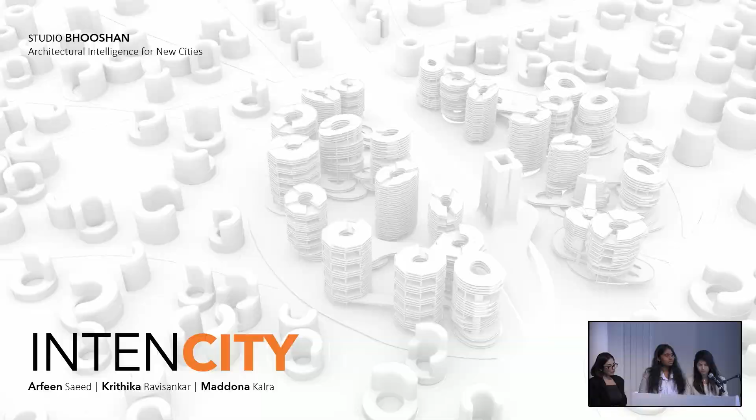Our thesis explores how urban intensification can enable a sustainable increase in urban populations, contributing to healthier and more vibrant communities.

A significant population increase is anticipated, with projections indicating that 68% of the world's population will reside in urban areas by 2050.

Bill and Melinda Gates emphasized in their foundation's annual letter in 2019 that we need to build one New York every month for the next 40 years to accommodate the growing urban population.

But focusing on New York, Manhattan boasts one of the highest population densities in the world, with over 70,000 residents per square mile. In contrast, Staten Island, located just 40 kilometers away and well connected, has a significantly lower population density of only 8,000 people per square mile.

Herein lies our unexplored Pandora of potential. Suburbs have attractive qualities like low cost of land, while they enhance connectivity to urban centers, making it easier for residents to access jobs and amenities, like light rail lines. Our thesis aims to capitalize on the various benefits suburbs have to offer.

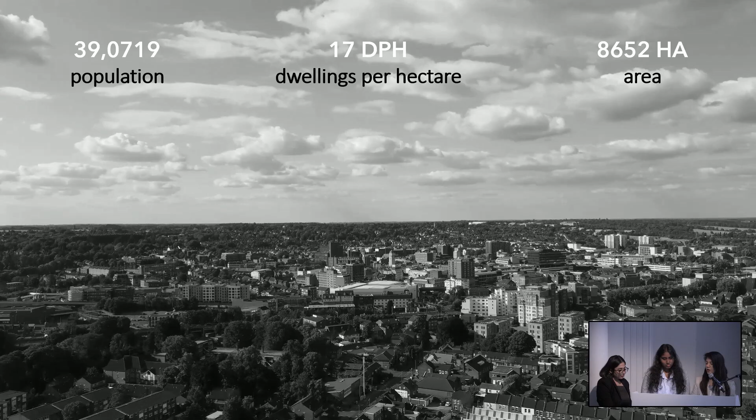Taking a look at Croydon, a suburb in London with over 8,000 hectares and merely 17 dwellings per hectare, shows unequitable distribution of resources, which with a little planning can be our best asset.

We intend to propose models focusing on intensification, which will have co-location of work, visit and live for mixed use, which allows us to use alternate modes of transport.

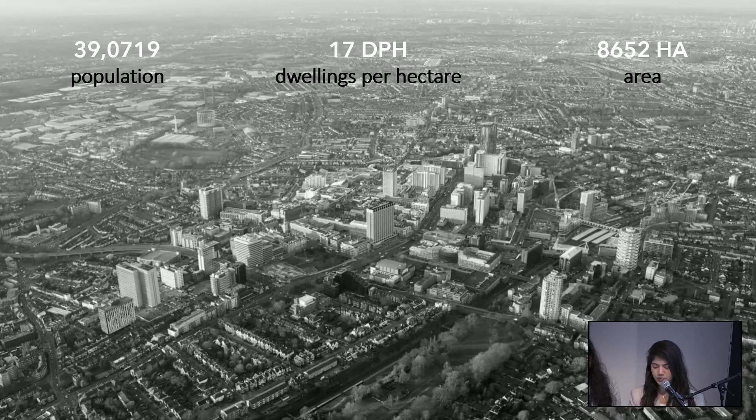Our Croydon model refers to areas which inefficiently utilized land and other built infrastructure. There are over 18 Croydons in London alone. This begs the question, how many such might there be in the entire world?

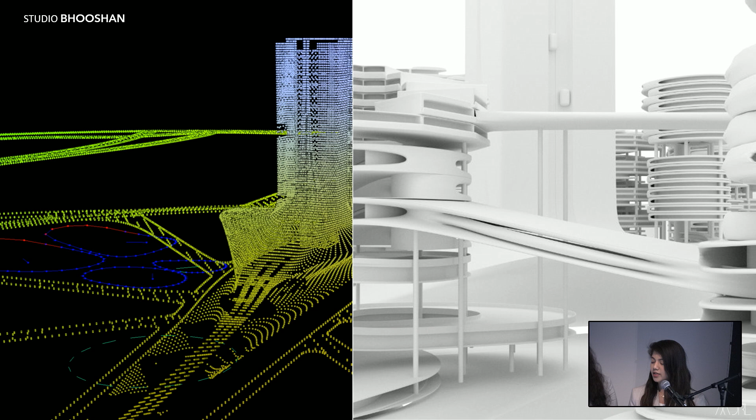We approached our thesis through two primary lenses, urbanism and architecture, emphasizing a bottom-up emergent strategy that prioritizes community engagement and organic development.

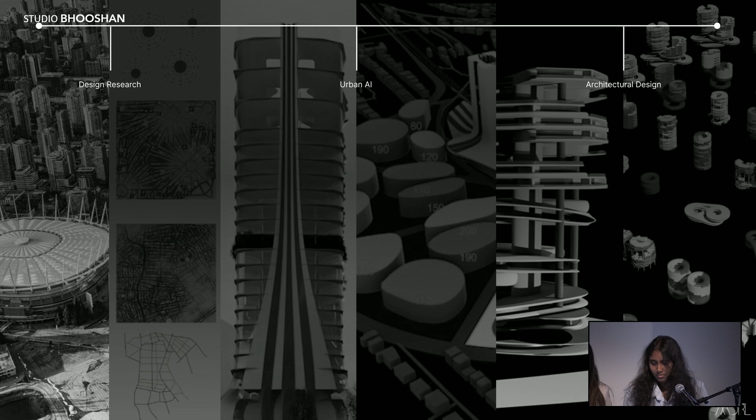The research methodology consisted of three notable phases: design research, urban AI, and architectural design. In our first phase, we studied at the scales of city, district, neighborhood, and the street level so as to be able to identify and benchmark our objectives for the thesis.

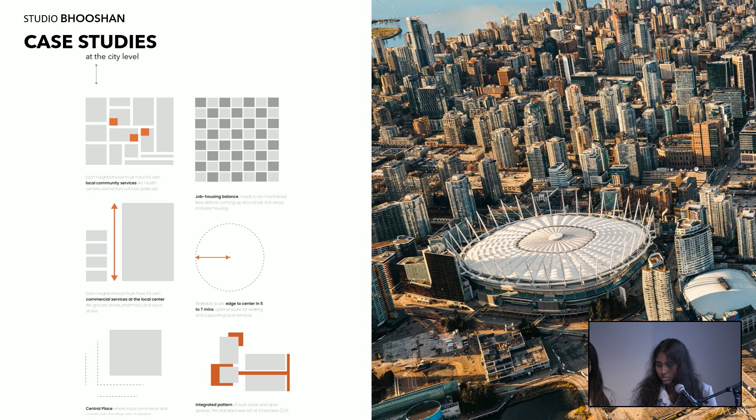Vancouver successfully implemented high-density development while maintaining quality of life. We learned of co-location of work, live, and recreational functions within the boundaries of a neighborhood, creating vibrant environments.

At the district level, our studies of neighborhoods and districts to maximize social interactions among residents yielded valuable insights from case studies of Poblenou in Barcelona and high-density neighborhoods like Choi Hung Estate in Hong Kong, like using public spaces as social catalysts.

Both case studies highlight design that prioritizes walkability and public settings that serve as a forum for association and social interaction beyond home and work.

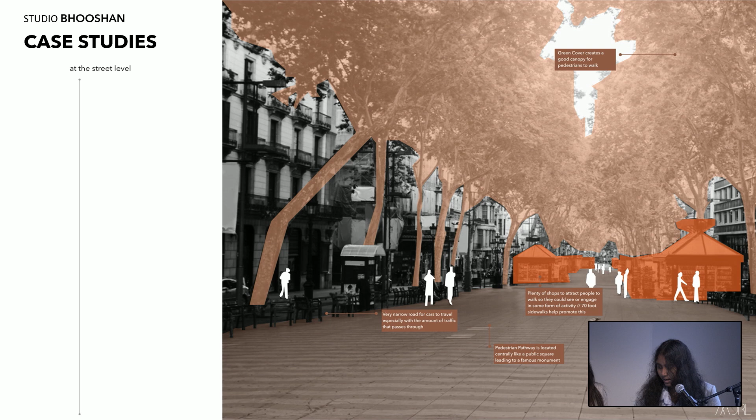At the street level, we studied streets like Las Ramblas, which revealed the crucial importance of human scale experiences, offering a first-person perspective that shaped our understanding of how urban spaces are perceived, which we later tried to use as a method of evaluation in our later studies.

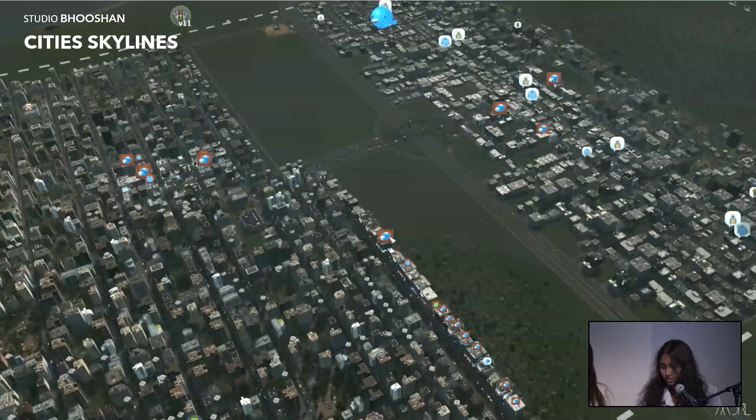Cities Skylines utilizes agent-based modeling to create a realistic urban simulation. Each citizen in the game is an individual agent with unique behavior and decision-making processes. This allows for a more accurate representation of how people interact with their environment and make choices within the city.

We studied the game for its urban dynamics, like happiness index, traffic index, and land value, as one of our key takeaways was its demand-based land allocation system.

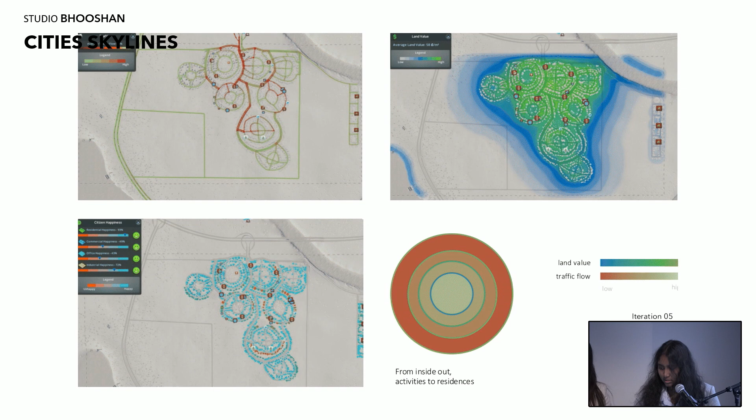As residential zones populate, demand for commercial area increases. When commercial zones fill up, industrial demand rises to provide jobs and goods. This system maintains a triangular balance between residential, commercial, and industrial zones. Each zone type influences the demand for others, which we try to replicate in our own urban system.

Here we are looking into contextual details of Croydon, about how many train stations we have there and how many trains per day are connected from Croydon to central London. As you can see, it's just 30 to 40 minutes away by train.

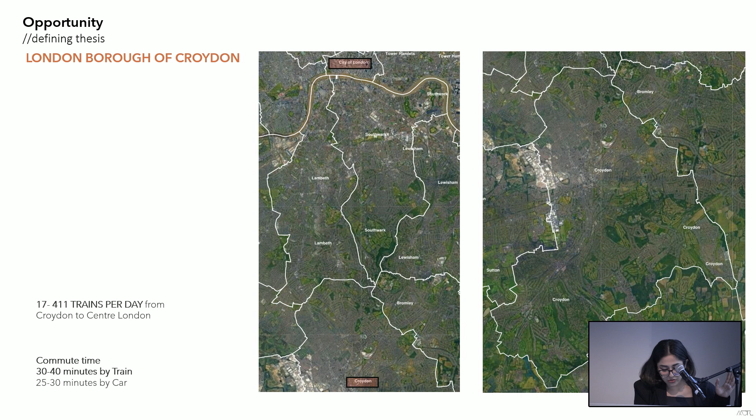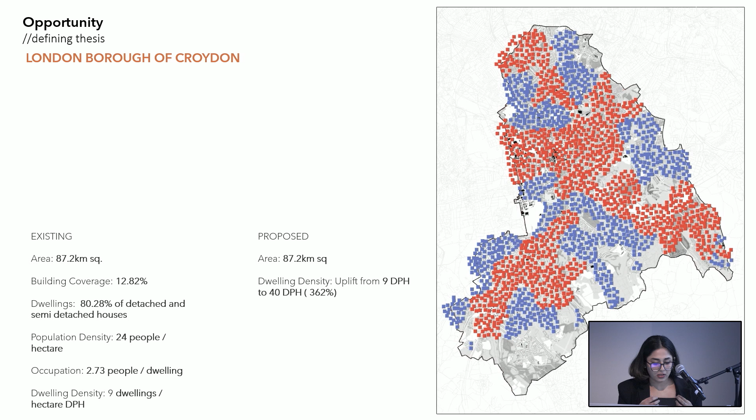So this is how we started looking forward into intensifying Croydon, which is one by one transit hub, and then later growing it throughout Croydon, which is 87.2 square kilometers.

Here you can see how time-based growth can affect the intensification of Croydon. It starts from the very basic 800-meter radius near the transit hub, which is 10 to 12 minutes of walking distance, hence increasing more walkability throughout the London borough of Croydon.

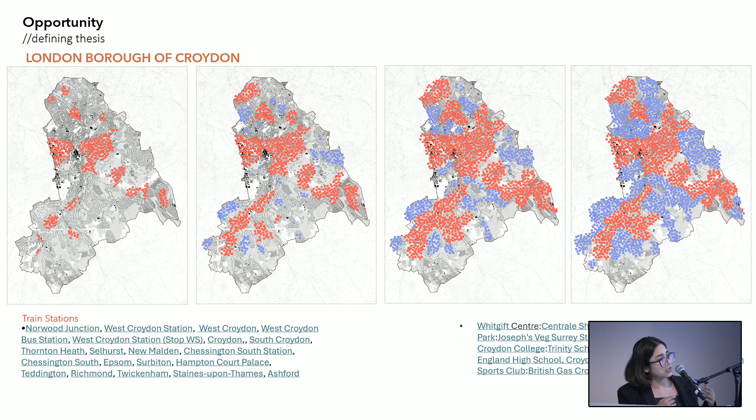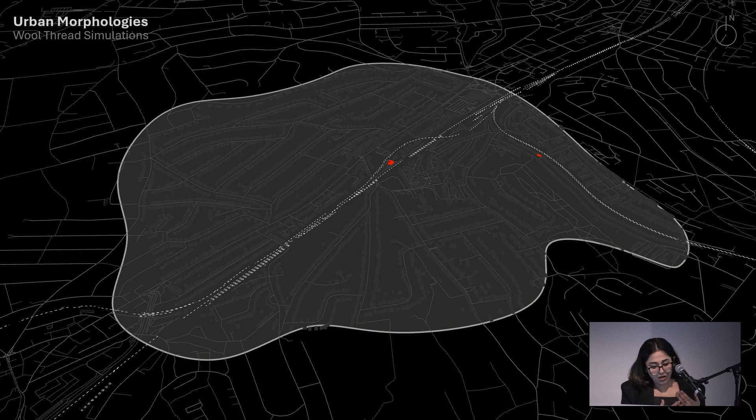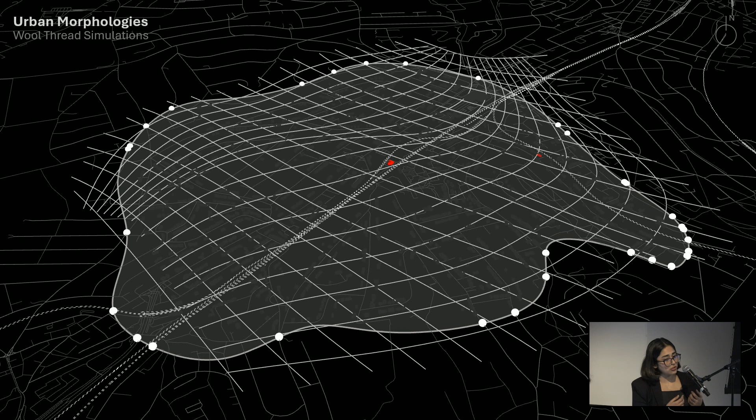We started first with the Reedham station in Purley. Here's our workflow for how we can achieve intensification through different optimization methods. We can try to optimize the greens and the pedestrian network as well as the vehicular network, ultimately combining the whole three approaches into a new urban model for Croydon.

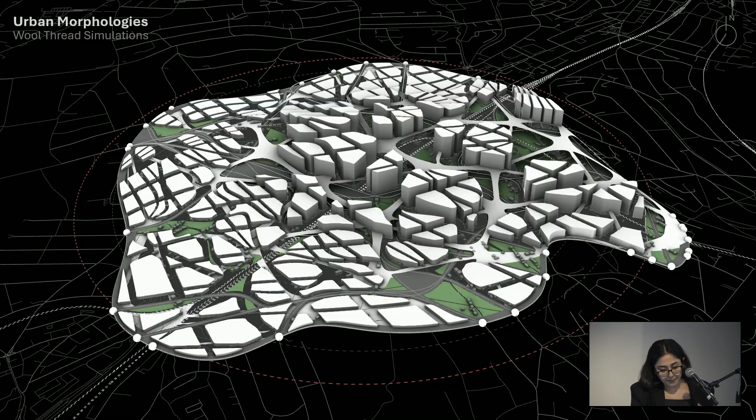The three different approaches are the green space distribution, pedestrian network, and road network. We start by connecting it with the outer existing road connections to give us the whole new network, and the green spaces can be equally divided from north to south and from east to west. In the pedestrian network, we try to connect the existing road junctions throughout the place so they can form a new pedestrian network, not just the vehicular one currently existing there.

In the road network, we try two different approaches: one is taking the train line as the separating factor of the two zones, and one which connects the two zones and is not affected by the train line. This is how the green spaces could be divided as well as the pedestrian network, and a grid deformation can help us in the road networks.

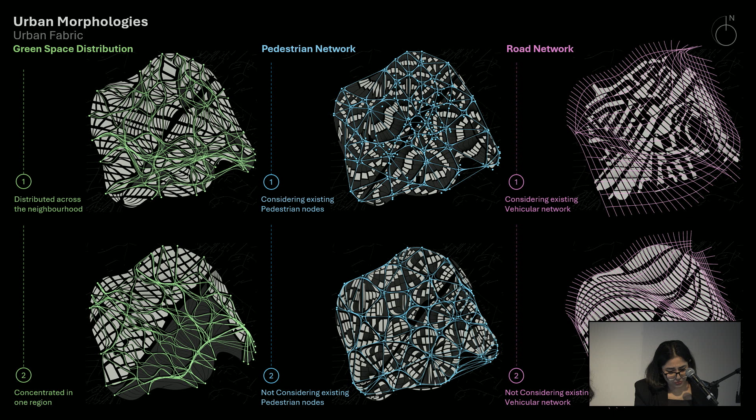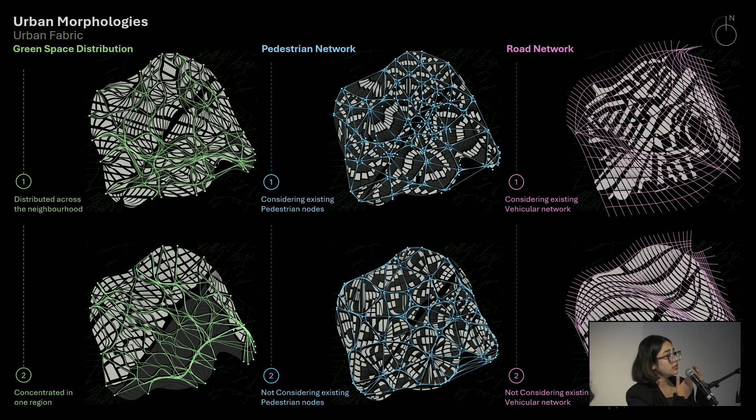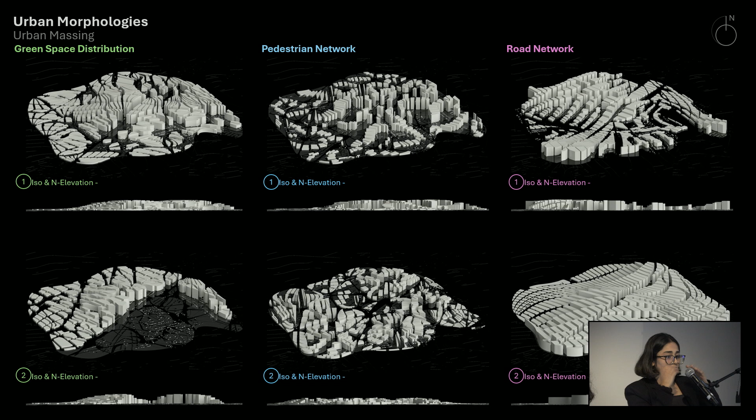Here are some urban morphologies, massing and the scalar heights of how we can also play with the gradient of the buildings, which could be a leading factor for people living there and walking throughout the area. They could locate the high-rise buildings, as we are trying to place the high-rise buildings near the transit hub, so if they are in the outer areas, they could follow the language of the city through these urban morphologies.

These are the height maps calculating and analyzing how it could be functional. Ultimately, a combined approach tries not only to emphasize the top-down approach, which is the urban morphology model, but also appreciates the fact that development happens in a bottom-up approach, year by year, building by building.

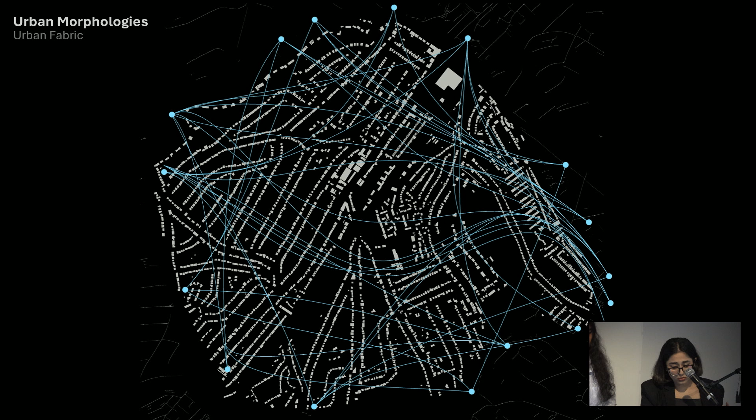Here it shows a custom code scripting for the transit hub, how it can start from one patch and then another, covering the whole area, not just in a one or two year development, but throughout the 50 years of development.

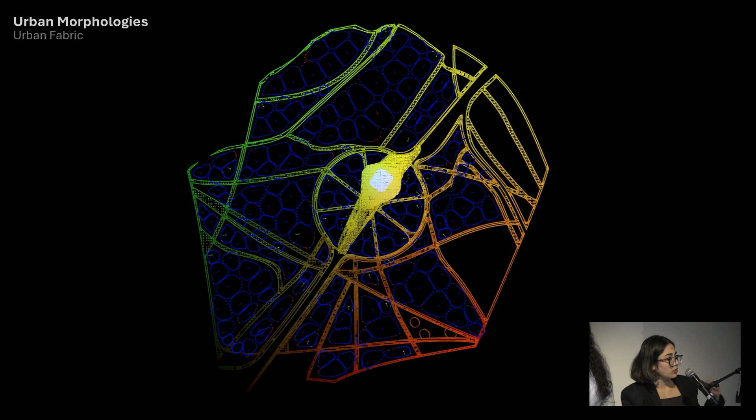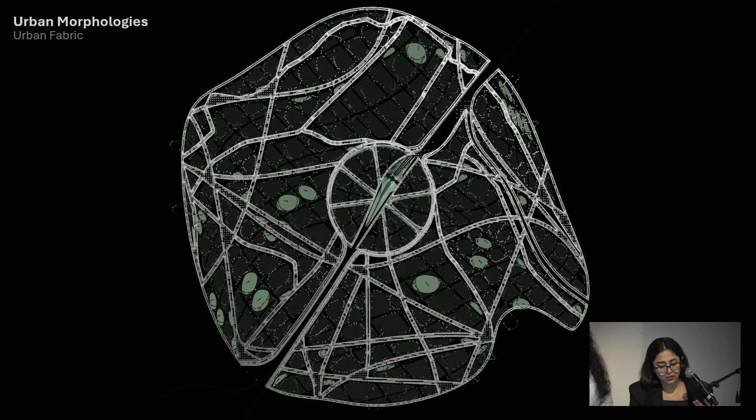Using the custom scripting, we achieved plots and the new road network, which values the pedestrian network more than the vehicular network, and equally divides the green spaces throughout the fabric. It gives a new language to Croydon, and also accepts and appreciates some existing road networks, because these currently have more footfall throughout the daytime, so we are considering all those factors.

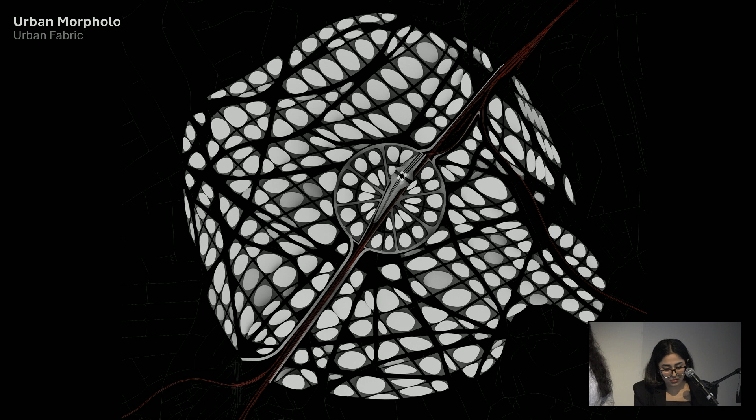These are some studies done on the model. We then try to achieve an urban model using the gamification method, which shows us how each building will function, not just with one function, but through time it can grow horizontally as well as vertically, floor by floor, not just one function per building.

The behavior of the game provides a user interface, and the user can choose what kind of cell typology to build, what shape of building, what function, in which zone, at what height and how many levels. We are trying to combine all those factors currently existing in real world development, and how each building can affect another because of their land use.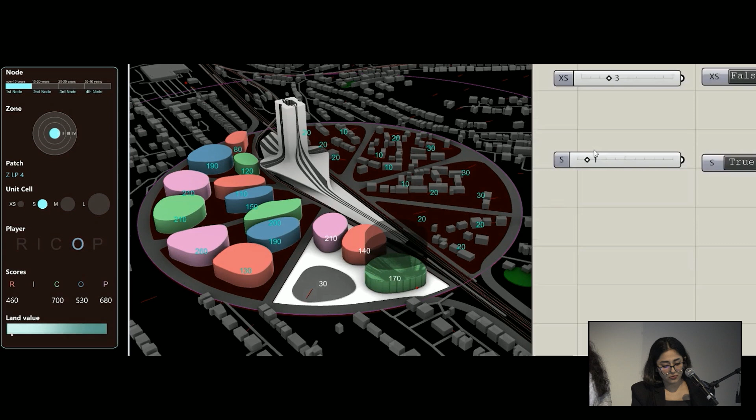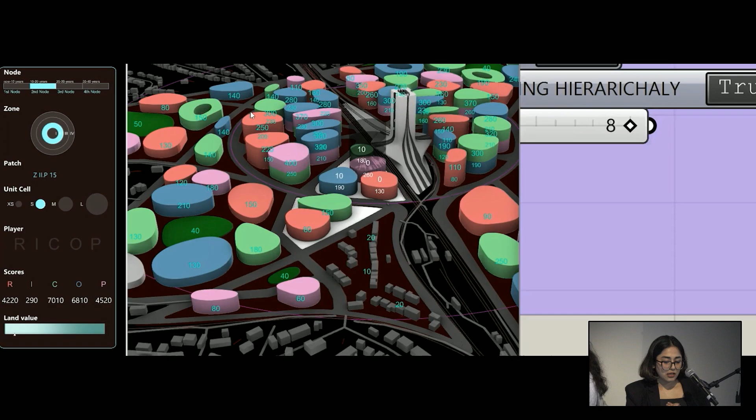Here's the first node development we try to achieve through the gamification method, where you can see the transit hub comes first, trying to accommodate 800 people and 400 apartments. Nearby that transit hub, each node development is increasing patch by patch, growing not just horizontally but also vertically.

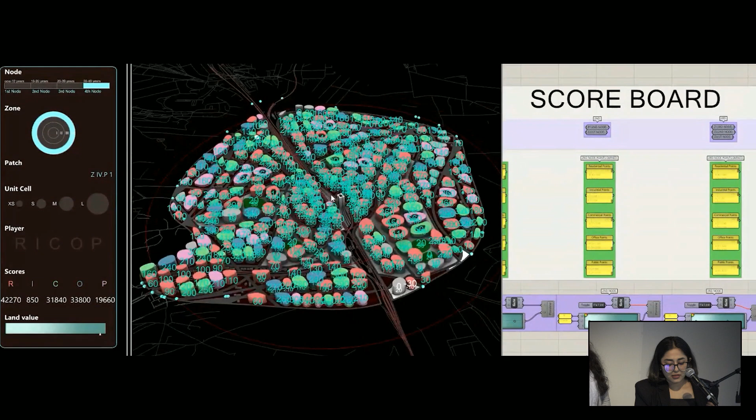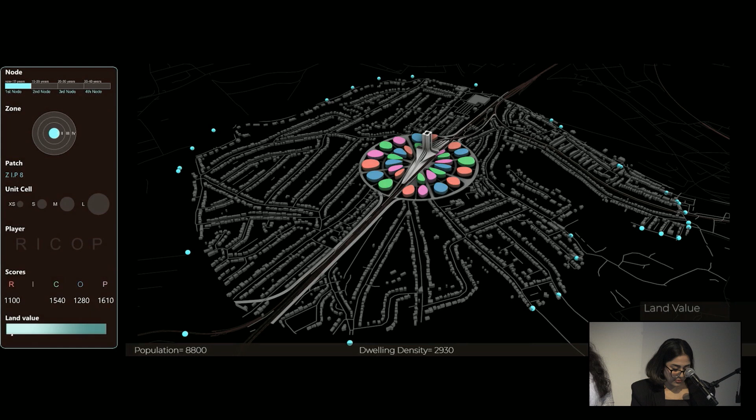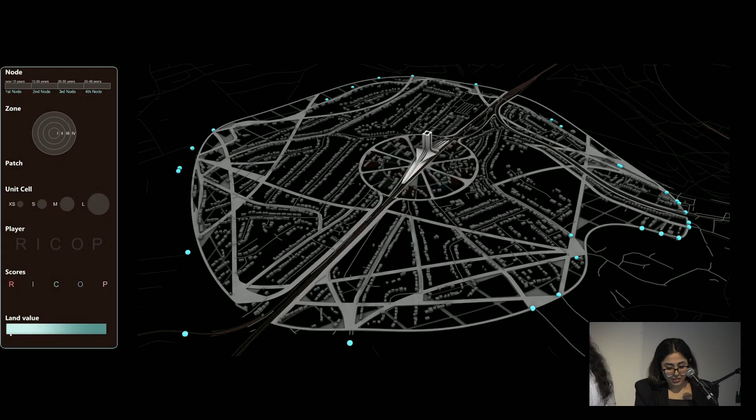The ultimate result of this model is to see how each land use affects the function, affects the land value, as well as the height map analysis. On the left-hand side, you can see the points also increase in RICOP, and we are calculating the density of how many people will be living here and in how many hectares.

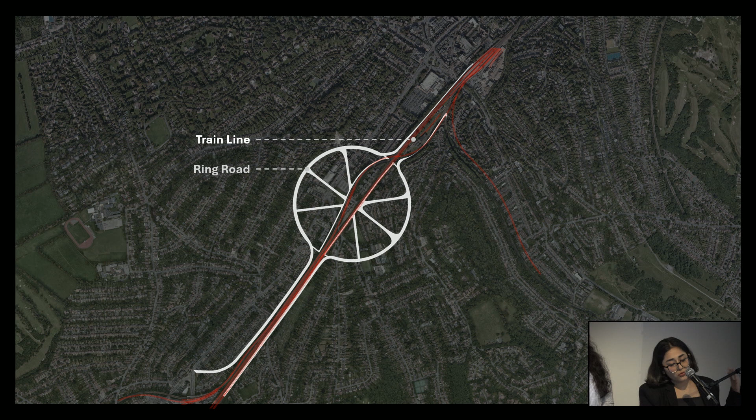Here we are looking into how we can detail out and develop the transit hub first, where the initial growth starts. Ideally, the development will start from the transit hub. You can see the train line is highlighted here, and then we have a proposed ring road around the 200 meters. So all these zones are connected to the main mega structure which we are trying to propose here.

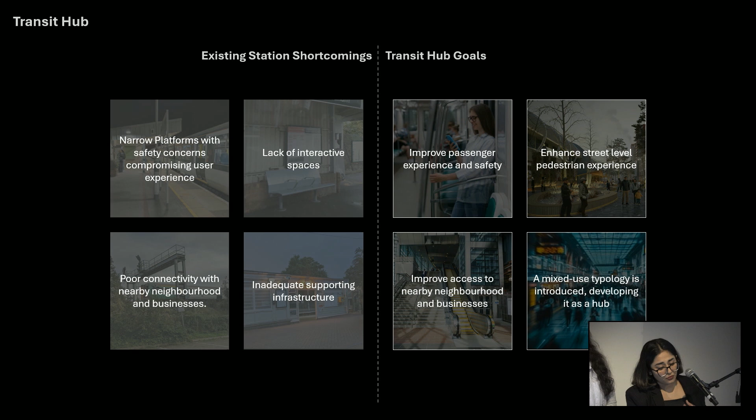The existing station shortcomings are narrow platforms and lack of interactive spaces, poor connectivity, and inadequate supporting infrastructure. The footfall is high there—it's 117 trains, for God's sake.

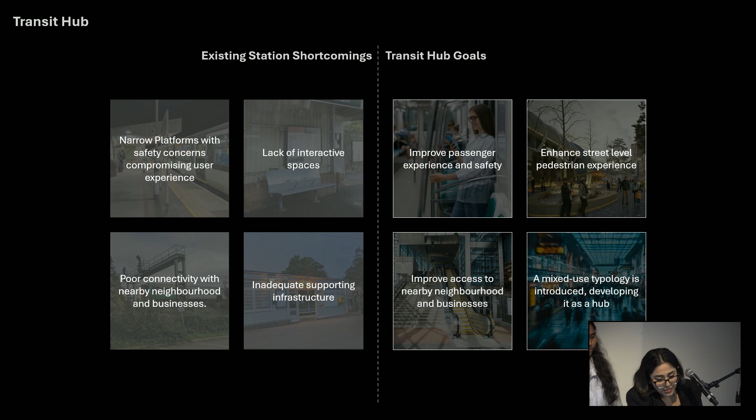We have transit hub goals we are trying to achieve, which is improve passenger experience and safety, enhance street level pedestrian experience, improve access to nearby neighborhood and business, a mixed use typology, and all those things which make the area more vibrant, livable, and walkable in terms of quality of life.

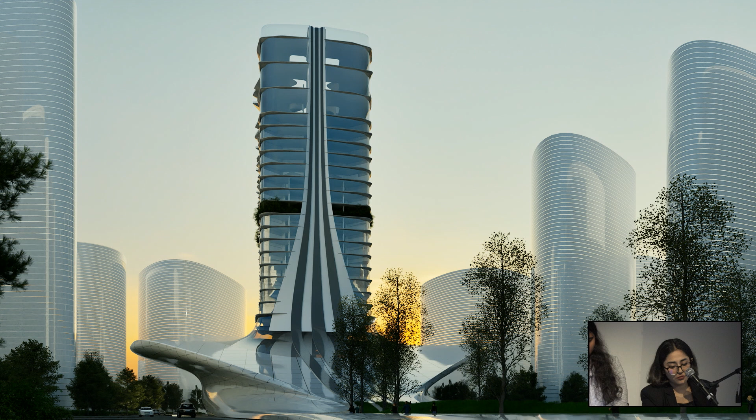Here is the initial sketch of a transit hub building, and these are some views. We are trying to achieve an aerodynamic language for this kind of architecture of the building.

In the podium level, it is comprised of commercial hubs, while above it there are 400 apartments in a residential tower, so that people can easily access and commute between Croydon and central London.

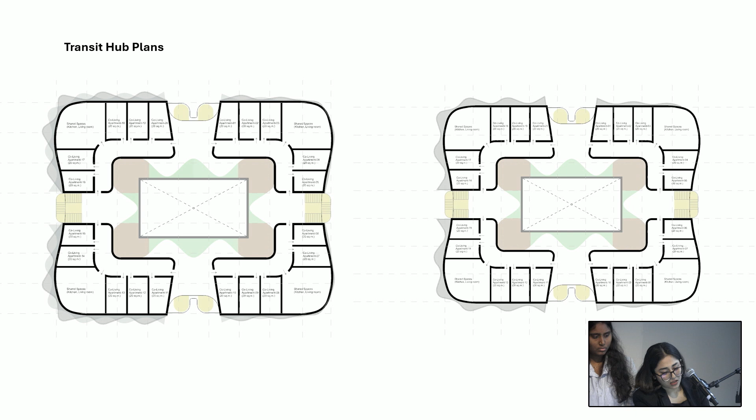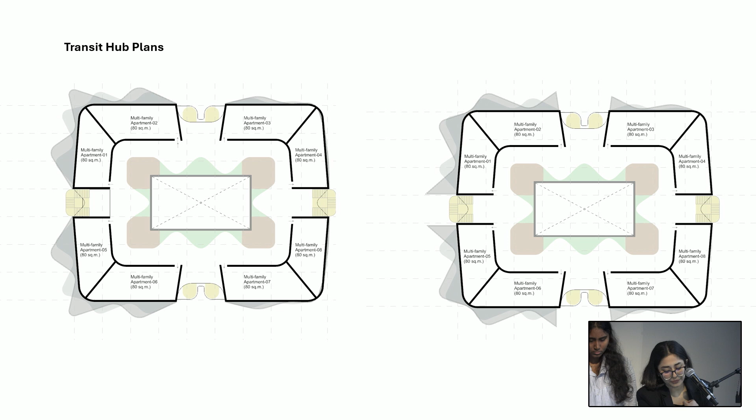We tried to plan out the layouts for single family and co-living apartments, as well as the multi-family layouts, and ultimately for the detached apartments as well.

This shows how the road connectivity of the podium level could be.

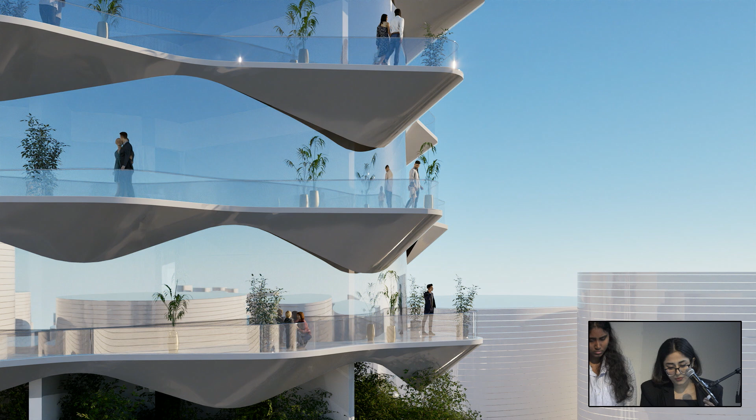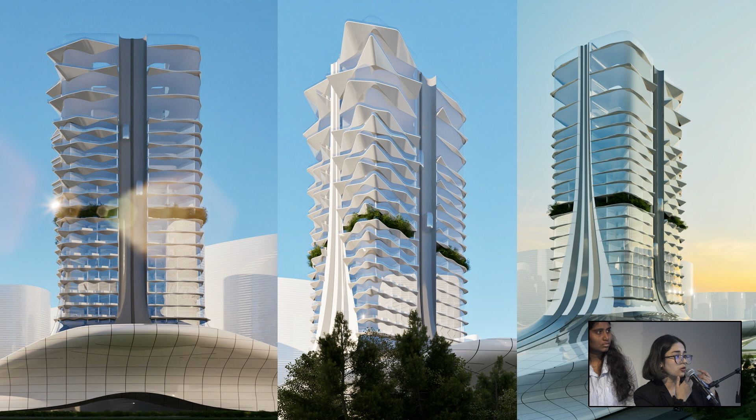We also designed the balcony and terrace system for the residential tower, which are oriented towards north and east, giving the whole building complete sunlight access in the morning time, while in the south and west it merges with the glass facade so it can incorporate more heat throughout the time, as it's quite cold in this area throughout the year, so we're trying to incorporate heat as much as possible.

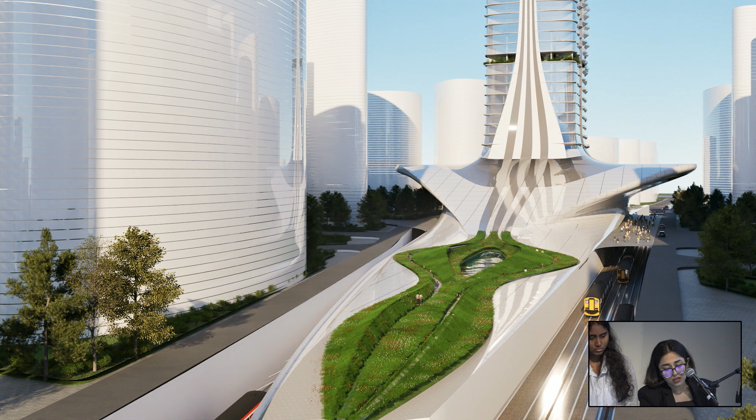In this view you can see how we are also using the podium level to give some communal spaces and green areas with some water bodies, and underneath there is an existing train line, connected through a bridge which is a pedestrian walkway. This is how we are planning to design our first transit hub in Croydon.

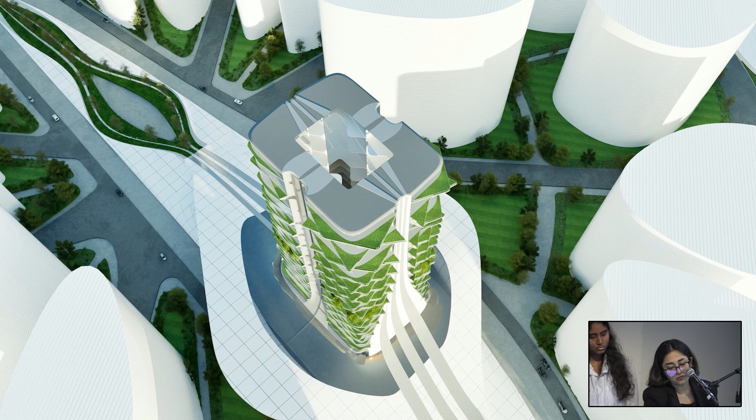This shows some green areas nearby and how they are oriented and developed towards the transit hub.

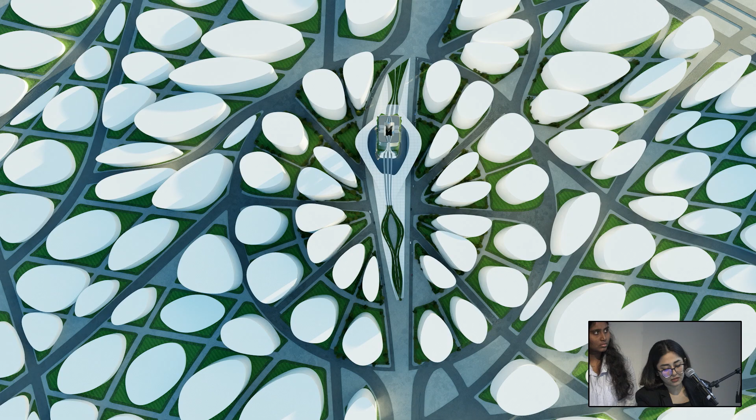At the building level, we begin our studies with shape grammar. Shape grammar provides a rule-based method for generating urban forms, allowing for systemic exploration of intensification strategies.

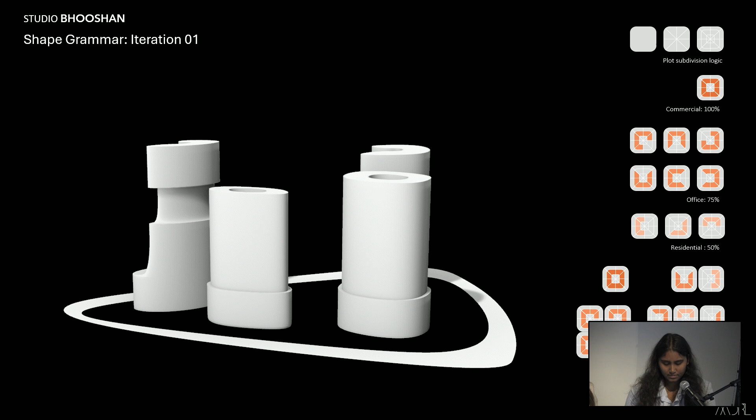We initiated our iterative process by subdividing plots and assigning volumetric shapes to three major typologies: commercial, residential, and office spaces. Each iteration was meticulously modeled and subjected to a first-person simulation, allowing us to experience the unique strategies from a pedestrian perspective.

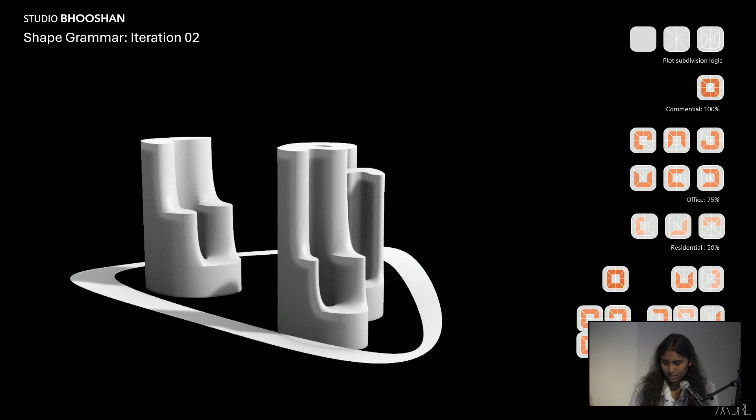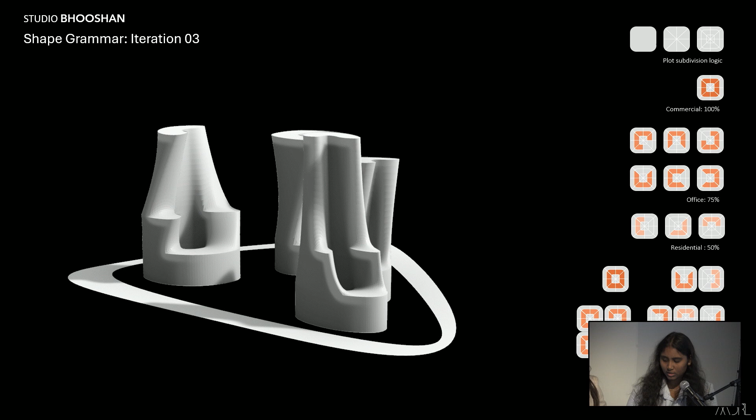Each iteration took us to the next one as we worked on the shortcomings and learnings of its predecessor. For example, in this iteration we tried to make the volumetric split more even and uniform between the three functions. Uniformity kind of led to an isotropic option. To avoid that, we tried rotating the floor plates to achieve uniqueness and placemaking in the neighborhood. Refining it further, we arrived at urban terraces, introducing a system of voids.

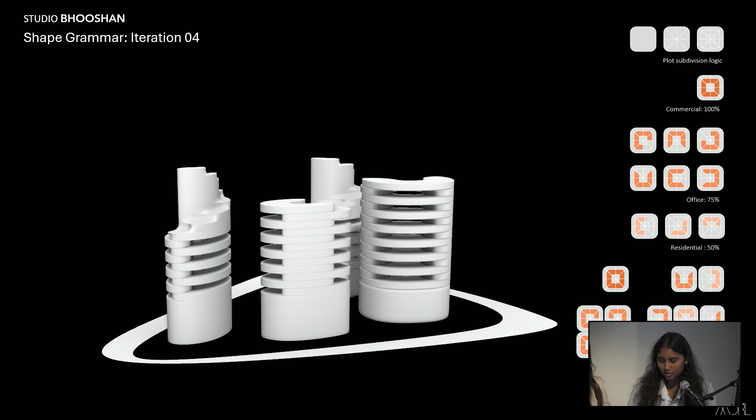Urban voids have been reimagined to create meaningful, quality urban spaces that promote human-scale interactions. We tried activating a roofscape in the commercial zone. Expanding public spaces allowed us to explore vertical urbanism through the concept of creating a multi-layered city.

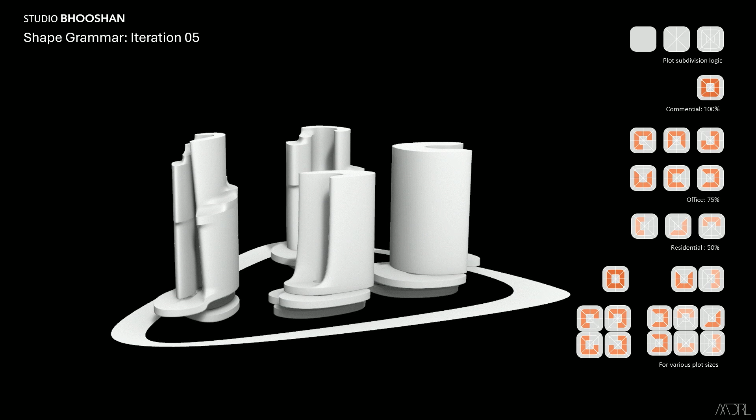We then attempted to interconnect the buildings as a way to promote interaction among residents at the commercial levels.

We finally arrive at our rule sets to be applied to the plots and building levels. Buildings in Zone 1, about a 5-minute walking distance from the transit hub, are about 60 to 80 meters in height. They orient towards the transit hub.

Residences feature maximum density and maximum void in the zone. As we move farther away, the buildings start to reduce in height, density also starts reducing, and the urban void starts reducing to 35%.

We continue seeing towers wane as we move further and further away from the transit hub. In Zone 4, we have the least density and the most openness in terms of plans for residential buildings.

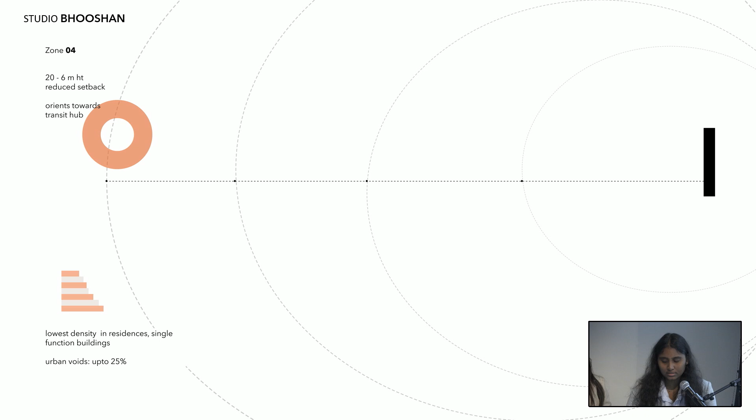Plot sizes in between, designated small, medium, large, and extra large, expand to create elliptical silhouettes of buildings. Together, if there are 2 towers in a plot, then they orient towards the transit hub.

Commercial, while low in height, occupies 100% of the ring, while office are given 75% and residences are given 50%. Buildings taper in area as we climb higher.

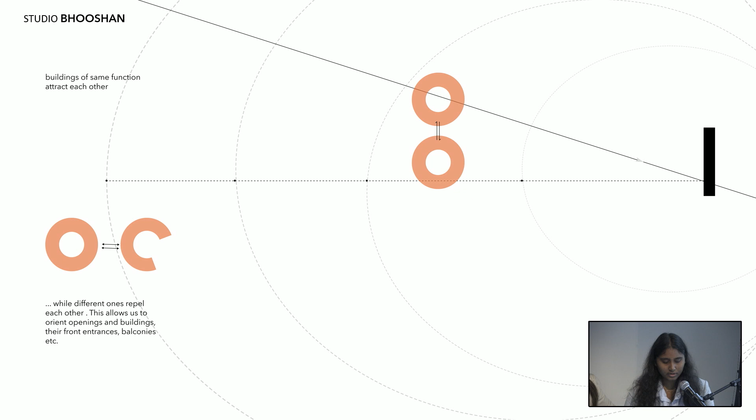Buildings of the same function attract each other, while different ones repel each other. This allows us to orient openings, buildings, front entrances, balconies, etc. Commercial brings together all the buildings by bridging one with another, creating a network of 3-dimensional spaces. These buildings often double as public arenas, functioning as spaces for social interaction.

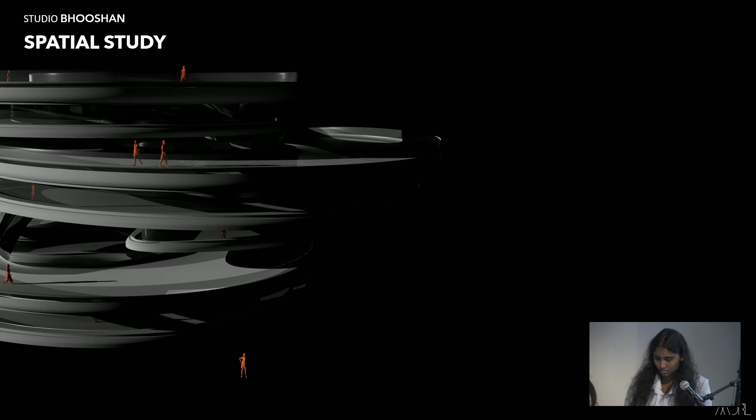Moving on to spatial study. Our design methodology at the building level prioritizes human perception and experience as the fundamental driver of urban space creation. This approach transcends traditional architectural practices by placing human interaction at the core of the spatial design.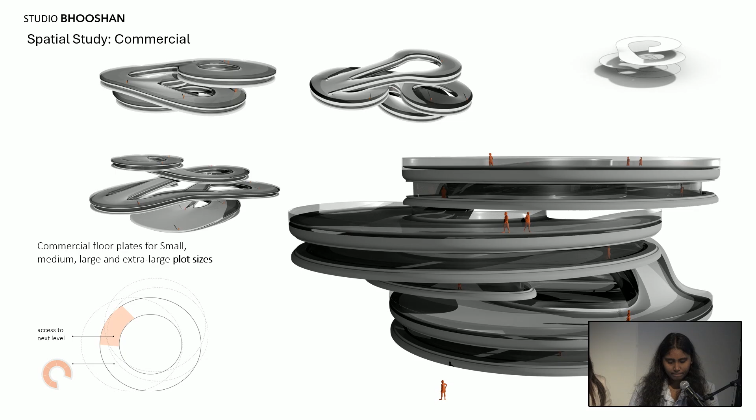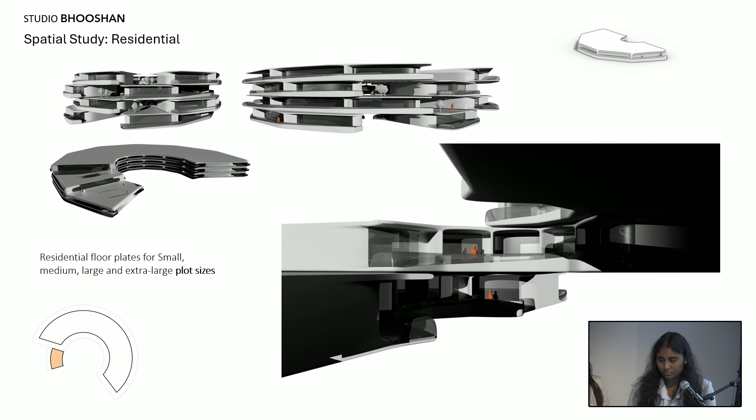Our design approach for commercial spaces embraces the concept of a multi-layered city, utilizing a system of interconnected floor plates linked by ramps and stairs, creating a 3-dimensional network of spaces that blurs boundaries between different levels and functions. Urban terracing allows for efficient use of limited land by creating multi-level structures that maximize living space without expanding the footprint. It allowed us to play with densities across different zones as we move away from the transit hub.

The approach to office design was made to complement the thesis by extending the concepts of interactive multi-level spaces from commercial and residential areas to office environments, creating a cohesive urban intensification strategy across all building functions. Here's one of the first views of intensified Croydon.

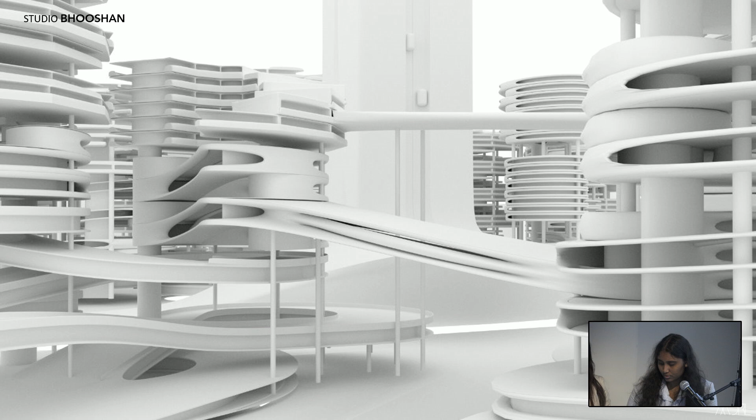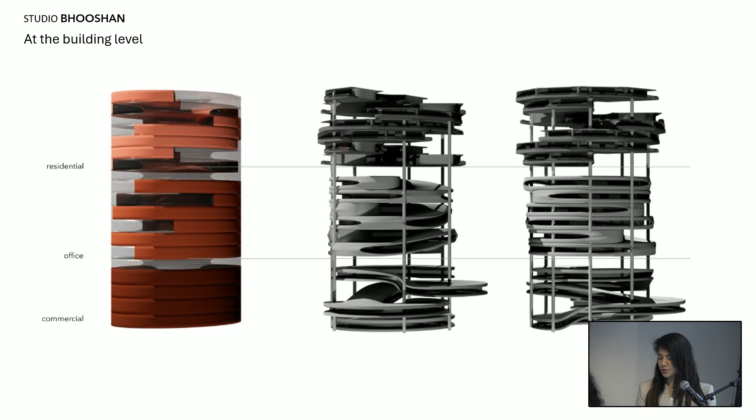At the building level, we followed a rule to place commercial at the lowermost, followed by offices, then residences vertically, so as to maintain privacy as well as to create a vibrant ground level.

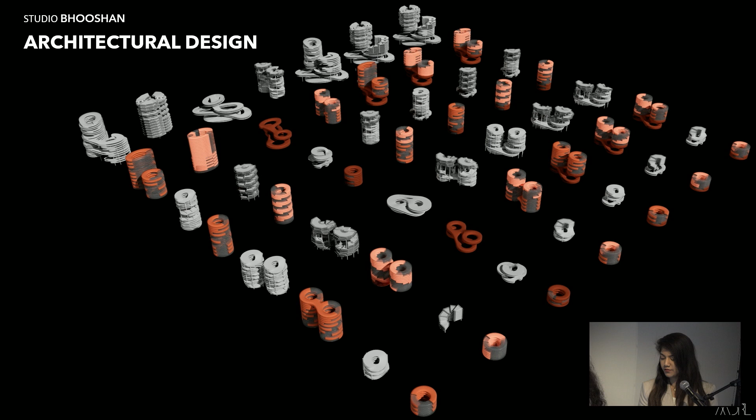Applying our rule sets across 4 different plot sizes, we arrived at 28 different prototypes of buildings that respond to context and various functional mix as allocated by our 4D allocation system.

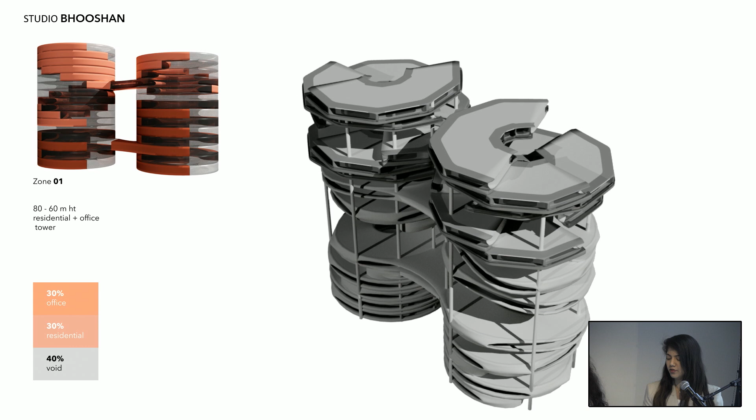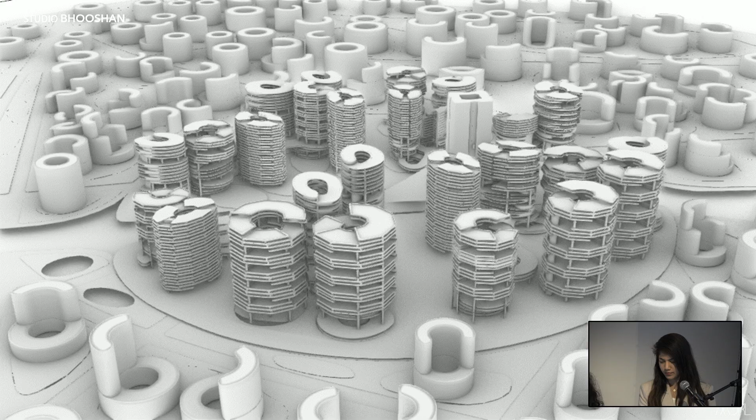Here is a closer look at some of those prototypical buildings. As you can see, this is how we converted our land use allocation into our spatial modules and buildings. This is our version of intensified Croydon.

Is it working? Yeah.

Okay, so here are our urban morphology models where we are trying to achieve different networks at road level, pedestrian level, as well as green level.

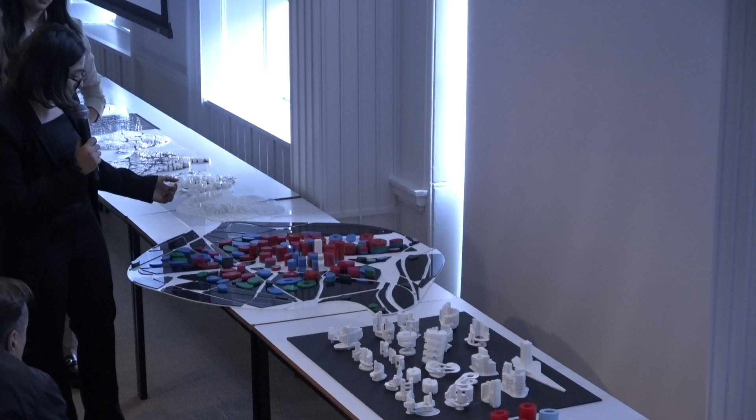And this is our game module, which shows the second node development, where Croydon has been intensified up to 50% of its limit. You can see how buildings are of different hues, as each color shows a different function, and how they develop in zones. Even the heights of the buildings develop through a particular variant according to their zone allocations, starting with the transit hub.

First, the transit hub building comes, and the height decreases as we move forward from the transit hub, and this shows how at the urban level in the 4D land use allocation, throughout time, the Croydon module can be intensified.

And here are a few versions of our final shape grammar. This is the 4D allocation of our shape grammar that comes from our game. And here are the plots, 7 different types, as we explained in our PPT.

They are the different shape grammars as we move ahead. And this is the final building system of our shape grammar, applied across one of our prototypical zones, zone 1. Thank you so much.